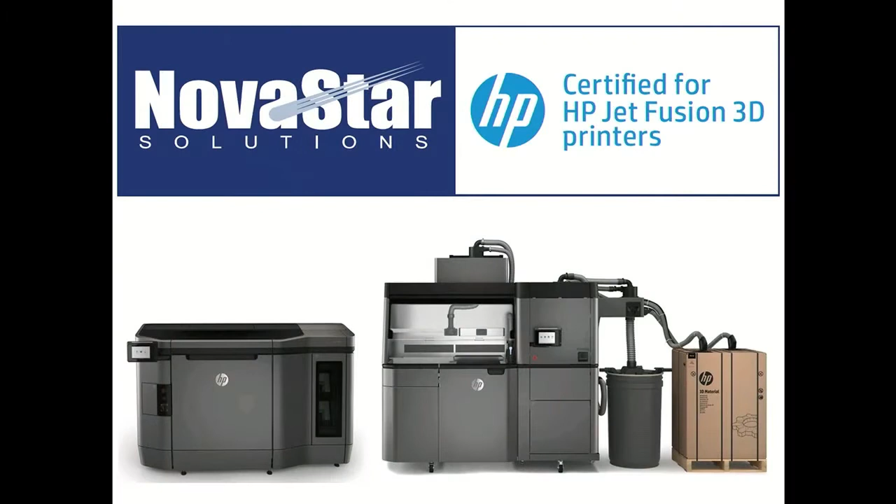Let's make sure I have this working properly. As I mentioned, NovaStar is a partner of Hewlett-Packard 3D printers here in the Midwest. This isn't a product presentation, but I'll show some videos and give you information during the discussion this morning for context. I have a question for those of you here today: how many people own a 3D printer? Okay, not that many. How many people have used or seen parts from a 3D printer before this morning? Okay, a few more. This technology is a little different than what you've seen before, giving the products a lot more functionality, but you'll see that as we present.

So to kick things off, I am going to show a brief video.

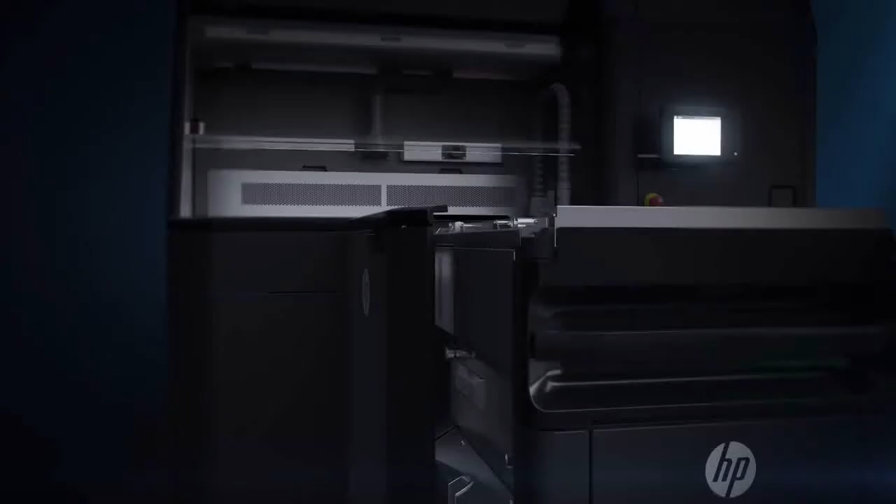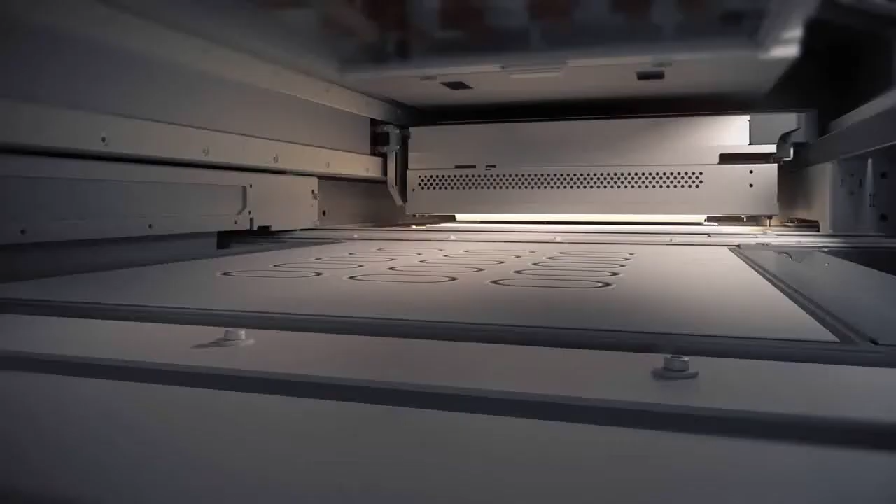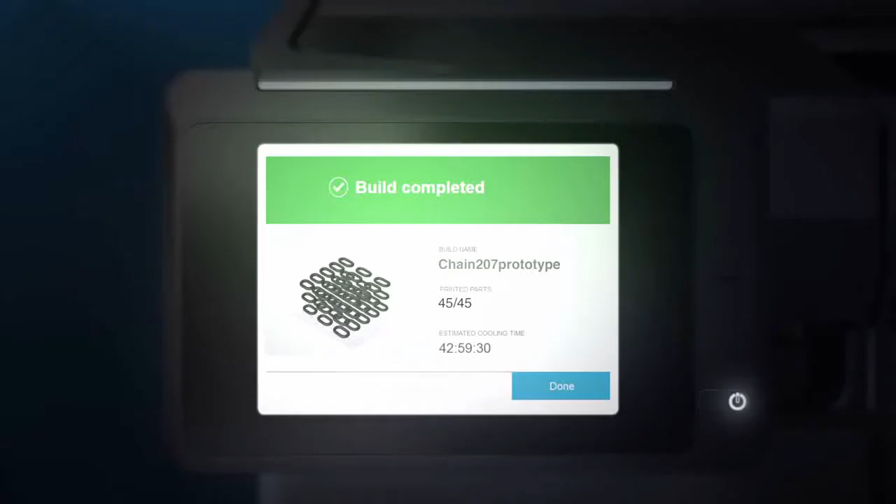Introducing the HP Jet Fusion 3D printing solution, made up of a printer, build unit, and processing station with fast cooling. Now you can deliver functional parts up to 10 times faster at the lowest cost. HP software enables easy job preparation and accurate job monitoring. The HP Jet Fusion 3D processing station with fast cooling is designed for a cleaner, more efficient 3D printing workflow. Replacing materials is easy—with materials loaded, the build unit slots into the printer so production can start. Preprint and in-printer checks enable predictable, quality output. HP Multi-Jet Fusion technology delivers extreme dimensional accuracy and optimal mechanical properties faster. Once the print job is complete, the build unit can be moved on for post-processing, and the next unit slotted into the printer so you don't have to stop production. The HP Jet Fusion 3D processing station makes post-processing easy, from faster parts cooling to cleaner unpacking and materials reuse and mixing, keeping the powder contained so you don't need an additional room for parts removal. New HP 3D High Reusability PA12 leads the industry in reusability, so there's less waste and less cost. The HP Multi-Jet Fusion Open Platform gives you access to a wider range of future materials and applications. HP Jet Fusion 3D Printing: start producing more functional parts within the same day, up to 10 times faster and at the lowest cost. HP, keep reinventing.

So to recap what was in the video, the printing process is really a four-part process. We put down an 80 micron layer of fresh powder, and then we apply two different agents. The one indicated with black is the fusing agent, and the one indicated with blue dots is the detail agent. The fusing agent goes down where you want part, and the detail agent is immediately adjacent to that where you don't want part. This enables very high resolution. If you look at some of these parts, like a knurled nut, the detail agent really enables that kind of detail on the part.

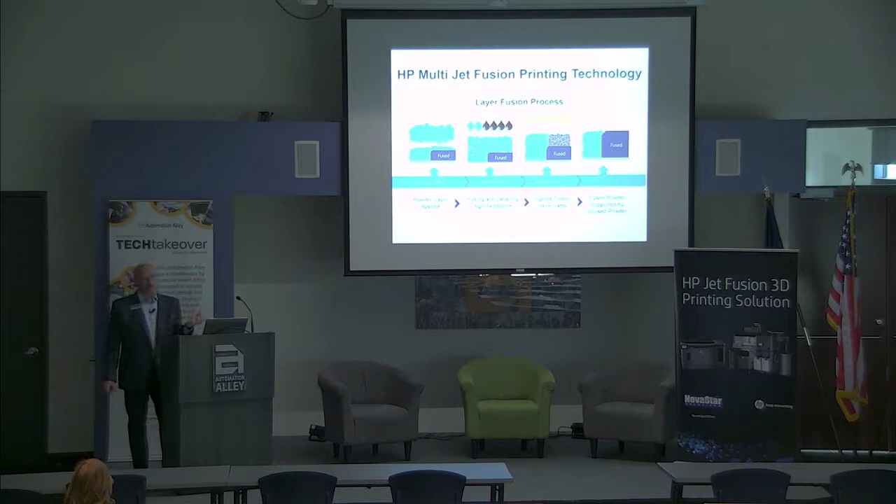Once the fusing agent and detail agent are laid down, we pass over with a heat lamp. Where the fusing agent has been applied, the parts fuse. Where the detail agent has been applied, it inhibits fusing so it does not fuse. Once the heat lamp has passed over, you have that layer properly fused or unfused where you don't want part. It does this over and over in 80 micron layers to build up the part. The nice thing about this technology is that it fuses multiple layers every pass, so you get really good entanglement between layers and really good material properties. The parts are very strong, and also airtight and watertight as a result.

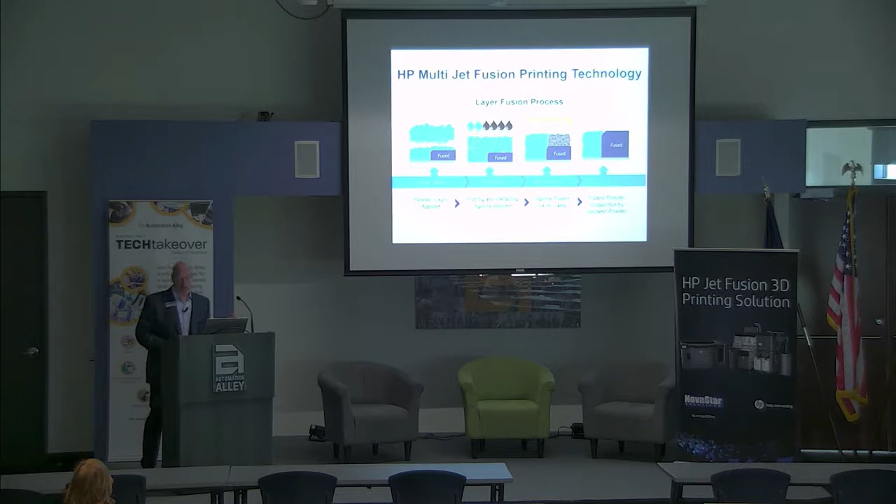Here's another video that dives a little bit more into that fusing process.

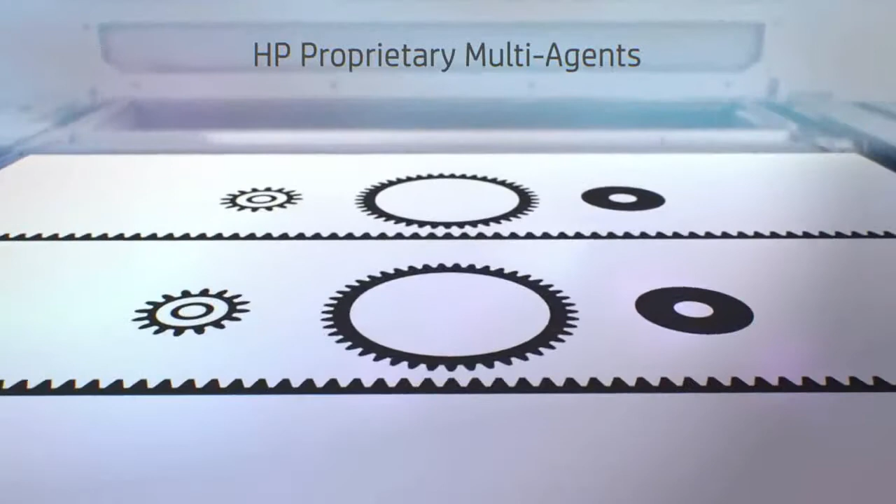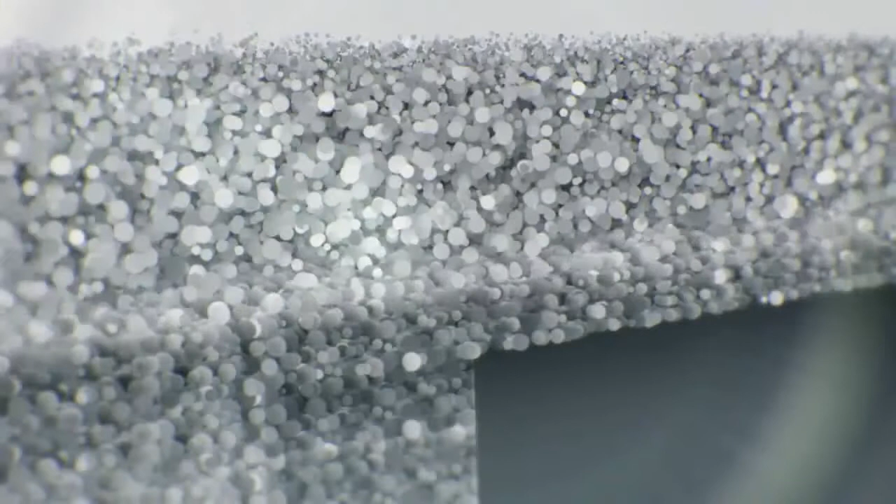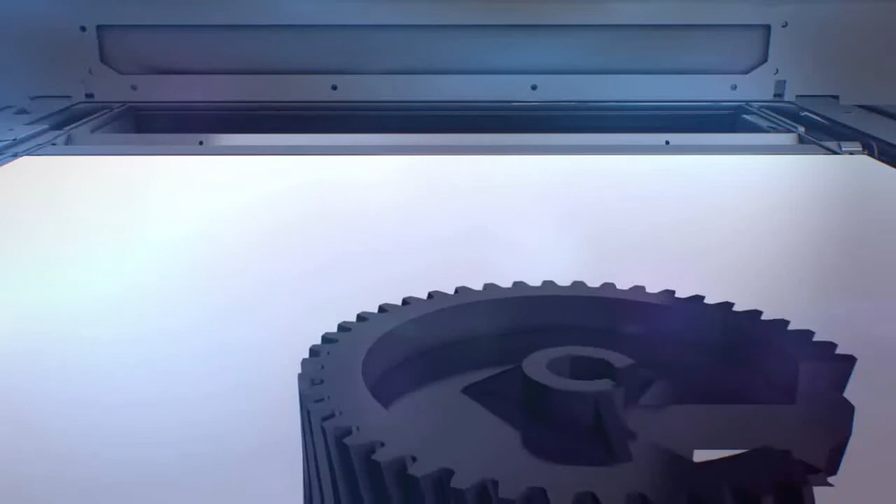To produce truly functional parts, it's important to ensure that the material has been properly fused and that part edges are smooth and well-defined. To achieve part quality at speed, HP invented a multi-agent printing process. In this process, a fusing agent is applied on a material layer where the particles are meant to fuse together. A detailing agent is applied to modify fusing and create fine detail and smooth surfaces. The area is exposed to energy, and reactions between the agents and the material cause the material to selectively fuse together to form the part. The fusing process requires accurate temperature control across the entire material layer.

One thing to note is that fusing process is not a chemical process, it's actually a thermal process. So the parts remain recyclable, and that's very important to some people.

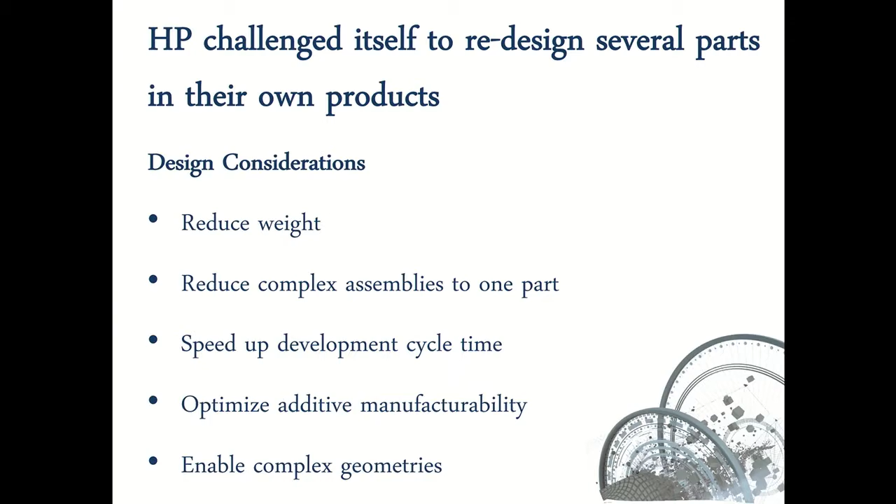Hewlett-Packard has developed the multi-jet fusion technology. Hewlett-Packard also makes a lot of other products. So one of the things HP did when they brought out this new technology was go back and look at the products they're already delivering, or will be delivering in the near future, to see what they could do using 3D printing and additive manufacturing. There's an adage in business, particularly as it applies to 3D printing: if it doesn't make dollars, it doesn't make sense. You don't want to use 3D printing just for the sake of using it, you want to use it in a situation where it adds value.

These are the design considerations HP looked at: if we're going to redesign a part, what criteria do we use? Reducing weight is something you'll see quite often, reducing multiple parts into one part, speeding up development cycles, optimizing for additive manufacturing, optimizing the manufacturability of the new 3D printed parts, and enabling complex geometries you couldn't achieve any other way.

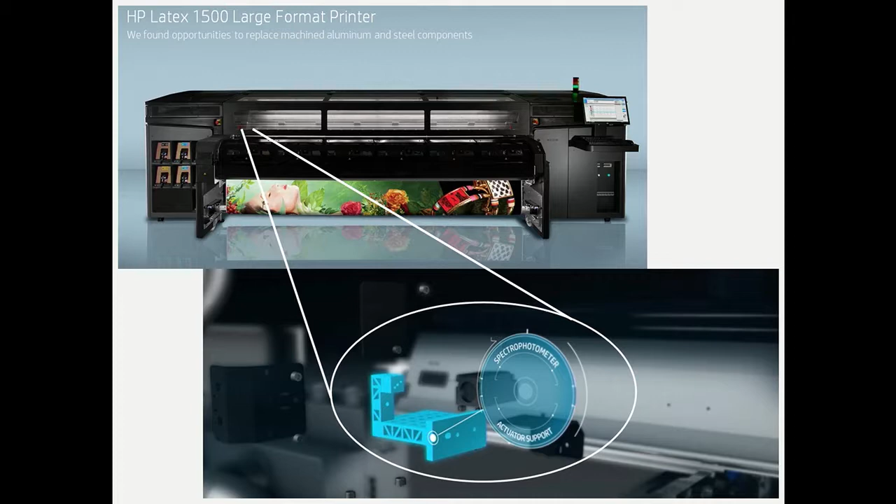So we're going to do a deep dive on each of those criteria. The first is design freedom to lightweight parts. This is a picture of a large format Hewlett-Packard printer used in commercial applications. Each of these printers makes incredibly lifelike images, and they have a spectrophotometer as part of the printer that's actually monitoring the output of the printing process to make sure it's what it should be.

So what they did was take one of the supports used for the spectrophotometer in this printer and decided to manufacture it with 3D printing technology. This is what the part looked like originally. It's aluminum, and it looks the way it looks because that's the easiest way to machine an aluminum block to achieve the function.

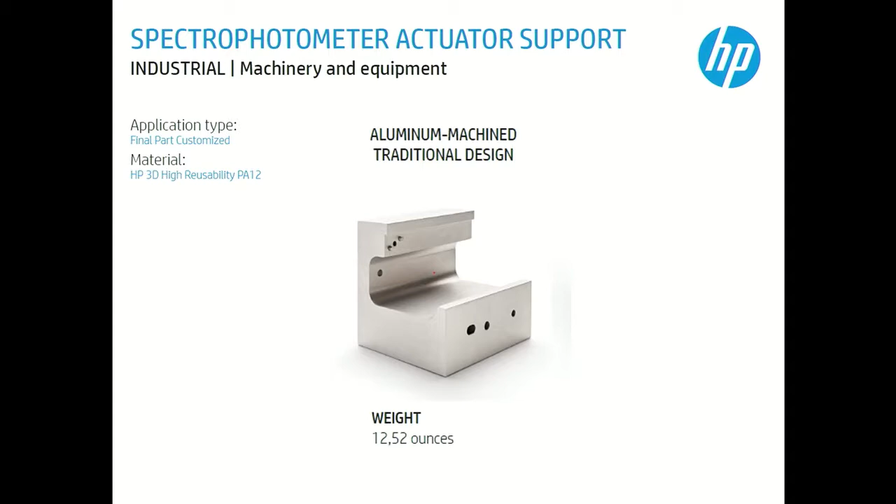So it was designed this way because of the manufacturing material and the manufacturing process. It weighs a little over 12 ounces.

What they did initially was they basically just replicated the design, but they did it with a 3D printed part. You'll see this very often in industry. People will take parts that they've manufactured a traditional way, and they'll basically replicate it.

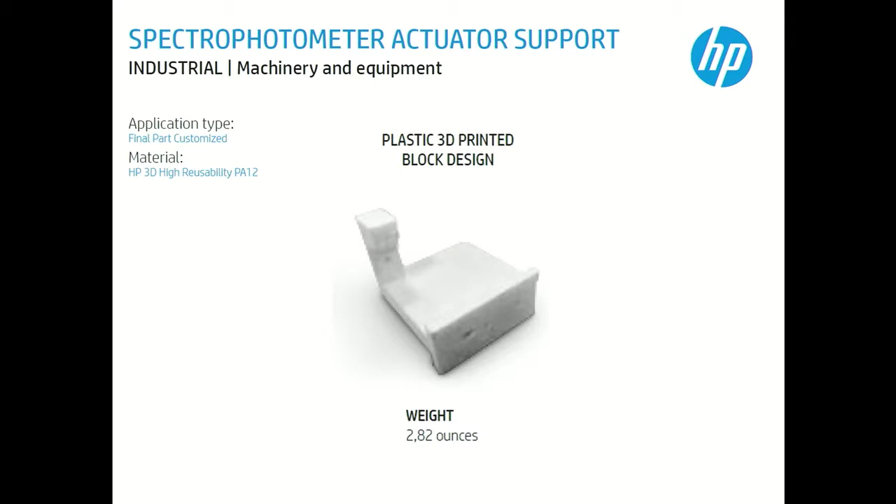So the first iteration, they just did this block pattern. It looks very similar to the initial part.

Then they said, okay, we can lightweight that. If you lightweight it, you can use a smaller motor, which costs less and will typically be more reliable. So they basically just went in and lightweighted it some, put some holes in it. You can do that. Again, you wouldn't do that with a traditionally manufactured part because it costs additional money to remove the material.

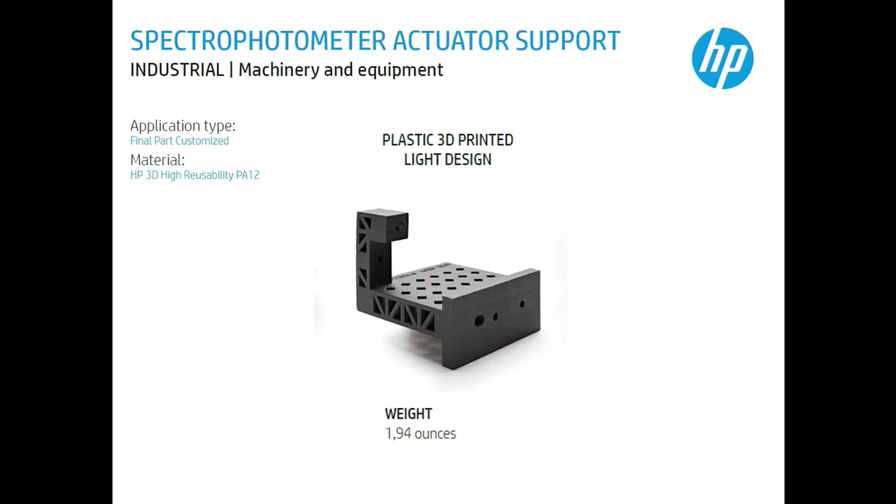But if you're 3D printing the part, it's just as easy to print that as that, but you have less material, less weight. And then they went one step further, with something called topology optimization. They said, okay, give me the minimum possible material that's still strong enough for the part. This topology optimization is a trend that's really growing in the industry.

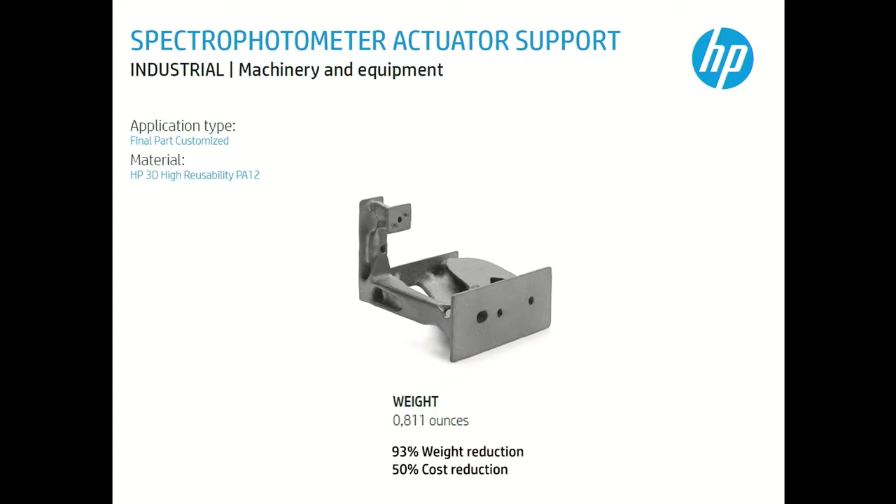There are several software packages, and you basically input some design parameters, and it will give you 15 or 500 options of how you can do it. You can't make a product like that with traditional manufacturing methods. You just can't do it. But with additive manufacturing, with 3D printing, the complexity is free.

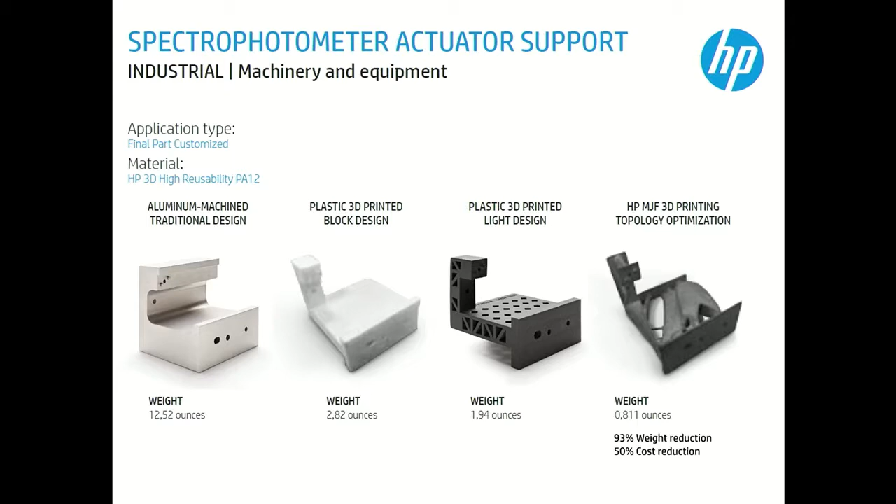So if you take a look at all of these parts and the progression they went through, the final part's weight was reduced by 93%. This final part weighed only 7% of what the original part weighed, and the cost was half.

So the question is, does it hold the same rigidity as the original part? And the answer is no, but it's sufficiently strong. The aluminum part was way overkill for what you needed. So when you design these parts, you have to know how strong it needs to be, and that's part of what you put into your design criteria for this

topology optimization. So no, the part on the right is not as strong as the part on the left, but it's more than twice as strong as it needs to be for the application. And that's the real question.

The part on the left is way overkill, but it's pretty easy to machine a block of aluminum. But it's expensive, it takes time, and it does add weight. Even though it's aluminum, it adds weight, which means you need a stronger motor now than you would otherwise.

The next design criteria we're going to look at is replacing many parts with one. So the part on the left is the original part that Hewlett-Packard uses. This part is actually used in the manufacture of the Hewlett-Packard print heads, which are very high resolution, 1,200 dots per inch, with very precise location of the holes, and they basically laser drill the holes.

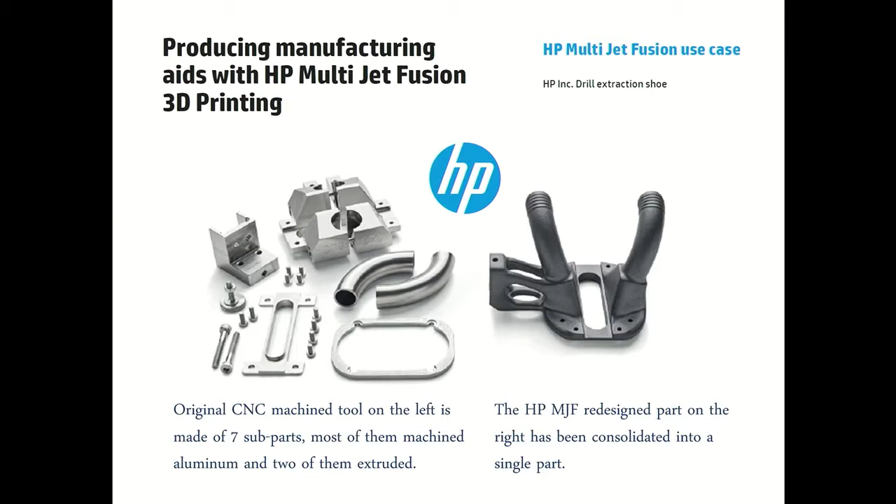In terms of reduction, it went from 575 grams down to 52 grams. The cost went from $450 to $18. And the manufacturing time was reduced from 3 to 5 days down to 1 to 2 days.

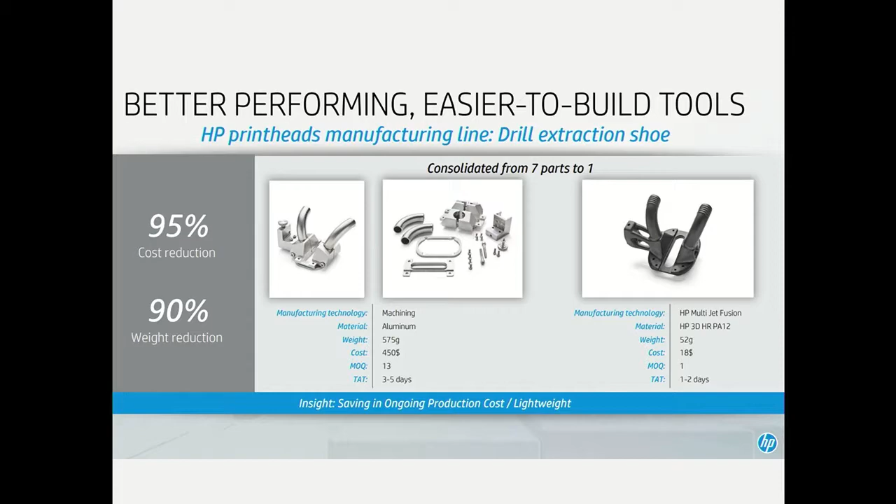So the part on the left, you can see that's the final part that's all assembled. The middle part shows all the component pieces. So it reduced the complexity in a very significant way. It made it much less expensive. You'll not know that by the price of buying an HP printhead, but it did have a substantial impact.

Yes, question? Yeah. Yes.

The left-hand side is being produced with traditional machining methods, CNC and extrusion, and then it has to be assembled together. The printer on the right uses multi-jet fusion technology, printing in a powder bed that's 11 by 15 by 15 inches tall, so you can be producing many parts in the same print build. It's typically an inch an hour, and in the 15 by 11 XY footprint you can be printing multiple parts with every pass, with multiple layers. I don't know how many you could print in one build, but quite a few. The left process, all CNC and extrusion, takes a lot of time too.

When you talk about some products, it's hard to scale up CNC machining because you need more machinery and more operators. If you're comparing it to injection molding, that's one thing, but if you're comparing it to traditional machining methods, it's going to take some time. Did that answer your question? Okay, thank you.

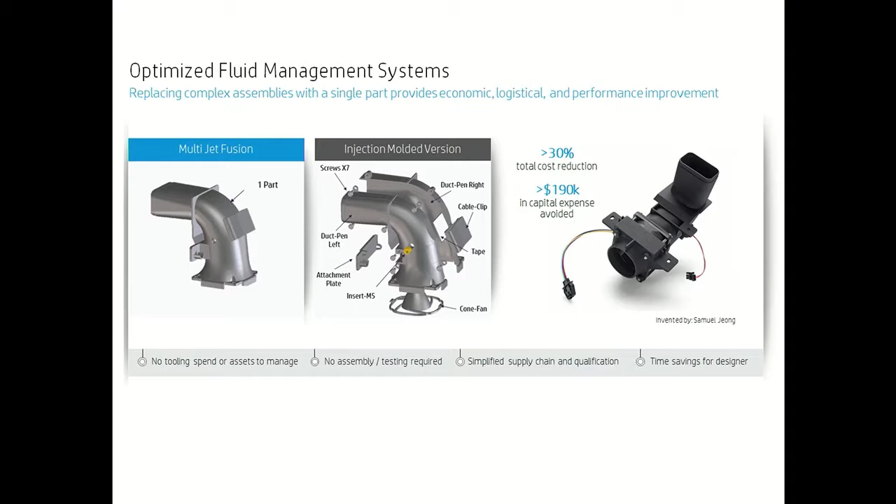Here's another example of a part where they combine many parts into one. This is actually a part used in one of the newer HP 3D printers. The injection molded version required many parts, and with multi-jet fusion they could do it in one part, but as we'll discuss, they actually did it in 2 parts because it was easier to manufacture that way. They were able to reduce the cost by over 30% and eliminate a lot of capital expense.

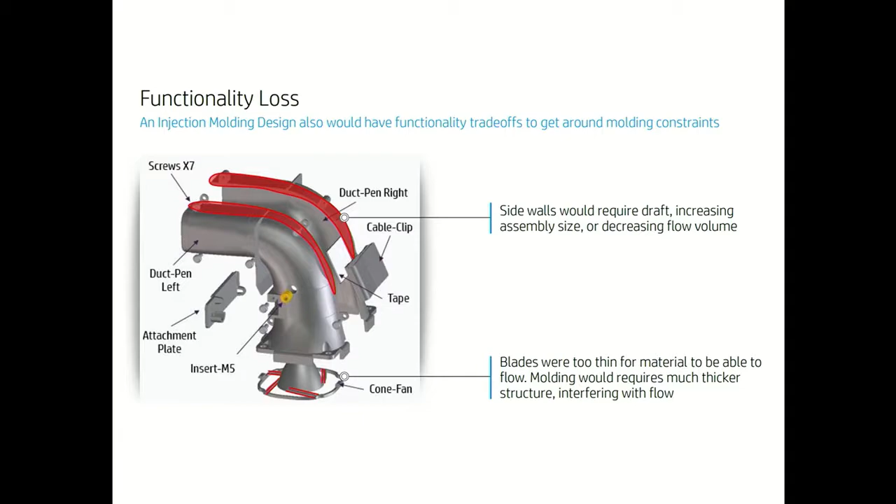Not only that, but the multi-jet fusion 3D printed part had better functionality because you were able to eliminate some of the design constraints you'd have if you were going to injection mold this part. The airflow characteristics and performance of the part were better than the injection molded part, and that was enabled by the 3D printing technology.

Another criteria Hewlett-Packard used when looking at parts to use 3D printing for was that they wanted to get these products out to market more quickly. This is a little Hewlett-Packard 3D scanner that you can use to scan parts, and they used 3D printing to produce some of the internal components rather than injection molding them.

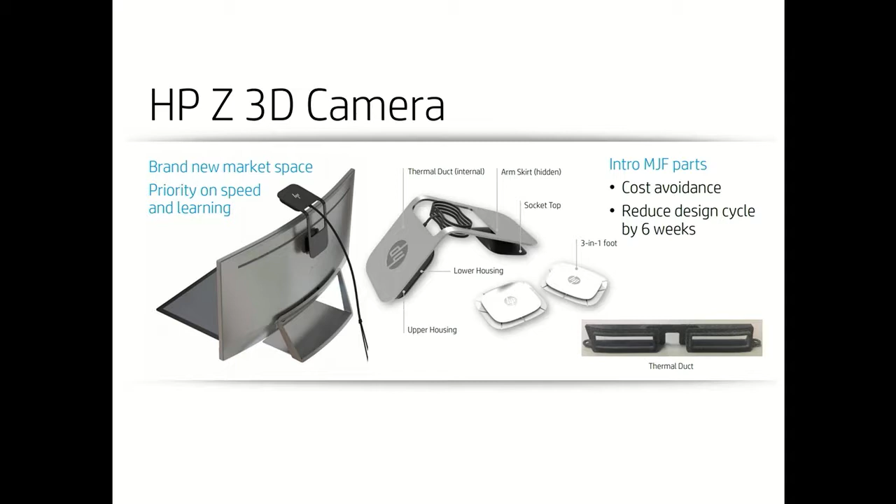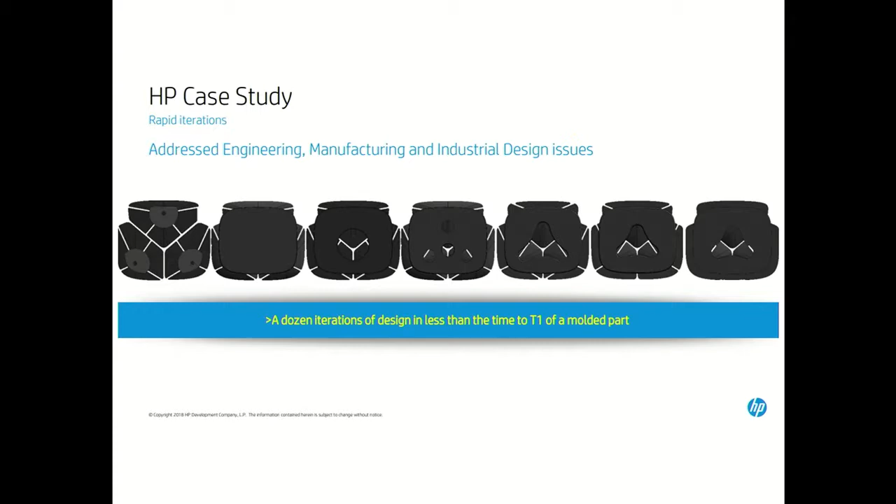One advantage of this technology is it's easy to test 5, 6, 7, a dozen different iterations of the same design to see which one works better. You can print them all in the same build, run them all, and test them out to see how they work. Injection molded parts do a great job, but you have to design the injection mold, machine it, and they're typically fairly expensive. If you make a slight tweak to the product, you have to create a whole new mold. With 3D printing, it's really not a problem - you can do multiple iterations at the same time and print them in the same build.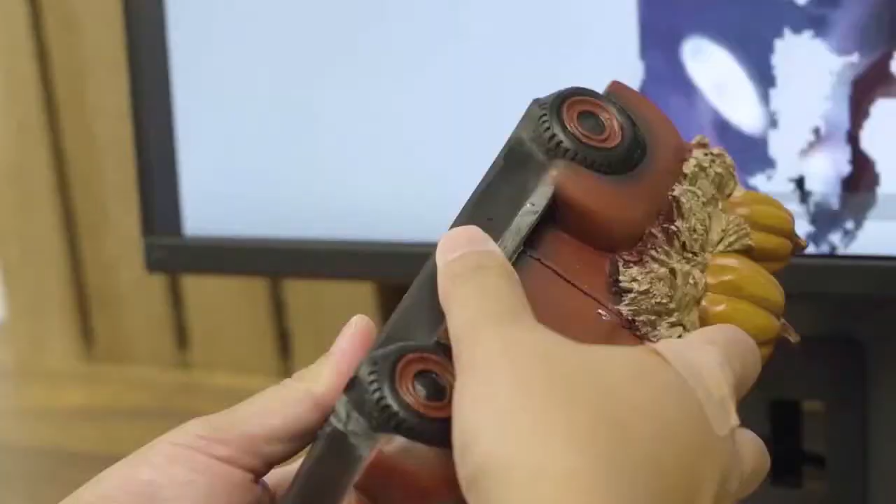Let's see, I think we actually have a video on this as well. This is the HP Z3D camera, and this is the first product from HP's computer business, Personal Systems Group, that used multi-jet fusion in development and in production.

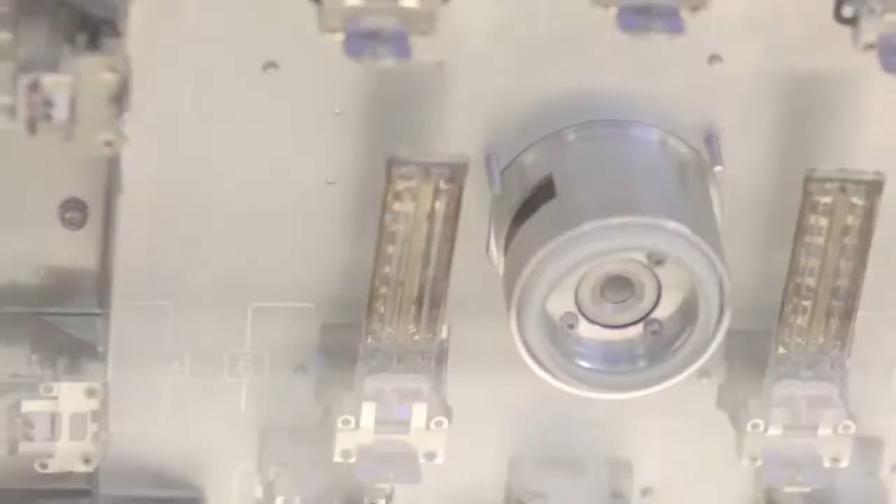When we see HP start to use some of their own technology in their own products, I think that's one of the neatest things about working with HP - their willingness to look at the technology and instantly bring it into their product development and then right into their products.

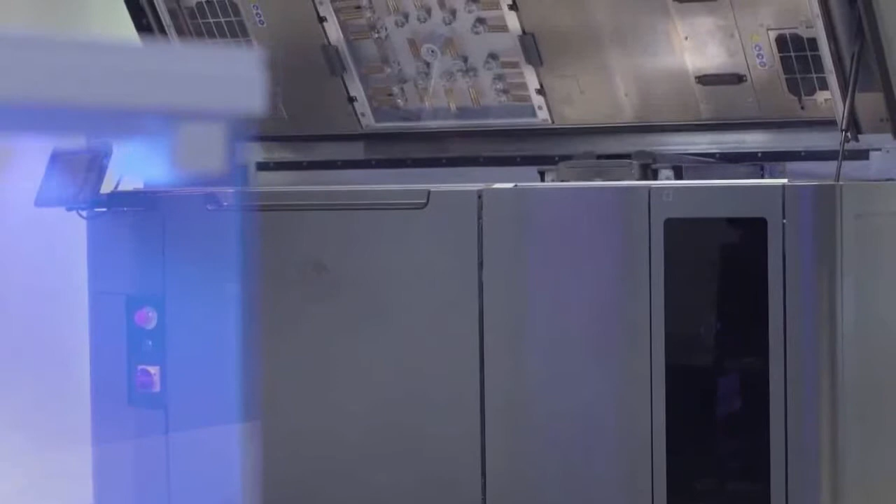The biggest advantage of multi-jet fusion is its speed and the quality of the parts. We had the luxury of being able to iterate the design rapidly and do more testing, and we did that thanks to our partners, Protolabs, who were able to be very responsive, give us very good quality parts, and produce nicely dyed black parts.

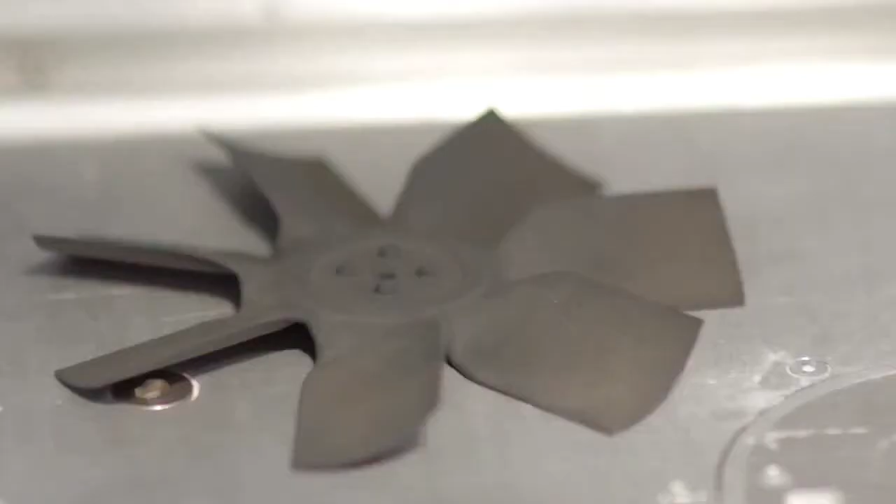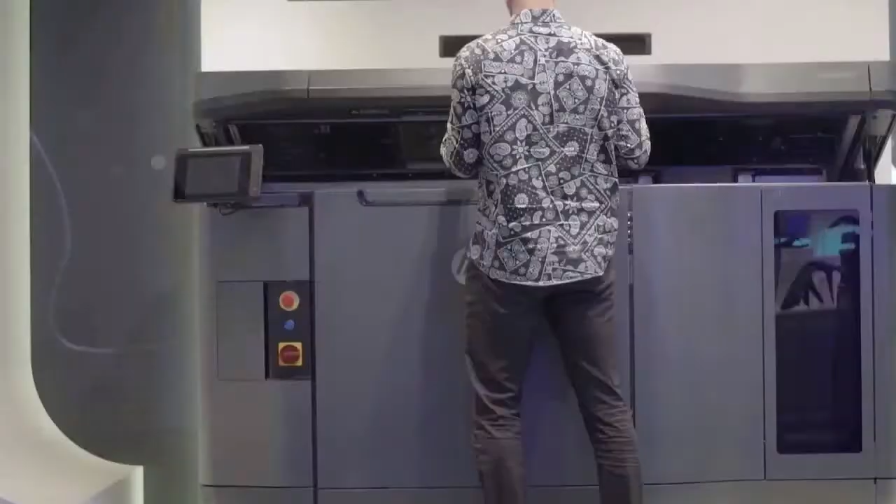Being able to work with HP using their own product is really neat, finding new applications within different divisions of HP to really test the limits of product development and looking at new ways of bringing products to market quicker. I have been developing product for HP for a long time, and I never had the chance to have 3D printed parts I could take to production.

The disruption that HP has created with the multi-jet fusion has allowed customers to really rethink how they design their parts, both for prototyping and production, and has opened the door to changing really the future of what manufacturing looks like.

A comment made in the presentation was a company called Protolabs. Protolabs is a digital manufacturer, as is DeWise, Paul DeWise, and Forecast 3D. Hewlett-Packard has partnered with a lot of companies throughout the country to provide manufacturing capacity to people who want to take advantage of this technology. So rather than printing parts ourselves, we partner with local businesses that develop the expertise, have the equipment, and can actually provide these parts to customers who can't justify the cost of their own printer.

One of the other criteria Hewlett-Packard looked at was how we can use 3D printing to optimize the manufacturability of components used in our equipment. This is the part you saw earlier that was designed for additive manufacturing. We can now 3D print the part - it's less expensive and has better performance than the injection molded part. But because of the geometry, we could only build 3 at a time in the build unit. So they tweaked the design slightly and broke it into 2 parts that could easily be assembled, and now they can fit 8 of these printed parts in one build. So they more than doubled their throughput just by a slight redesign of the part.

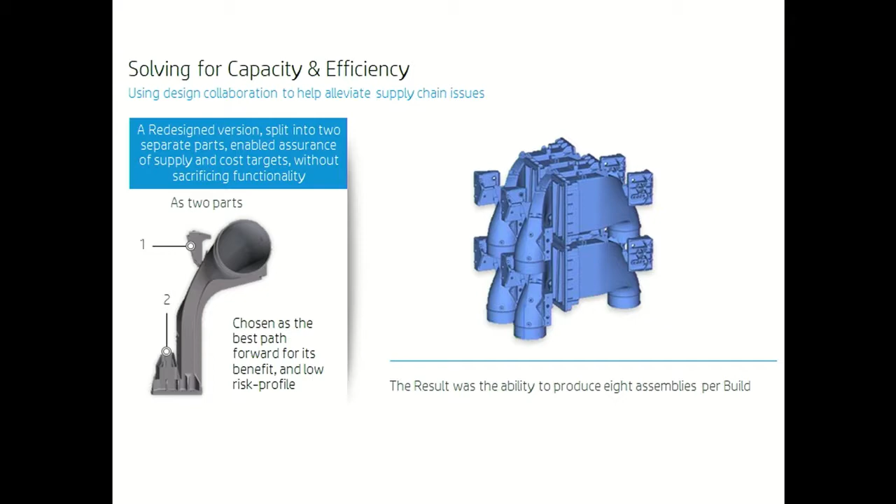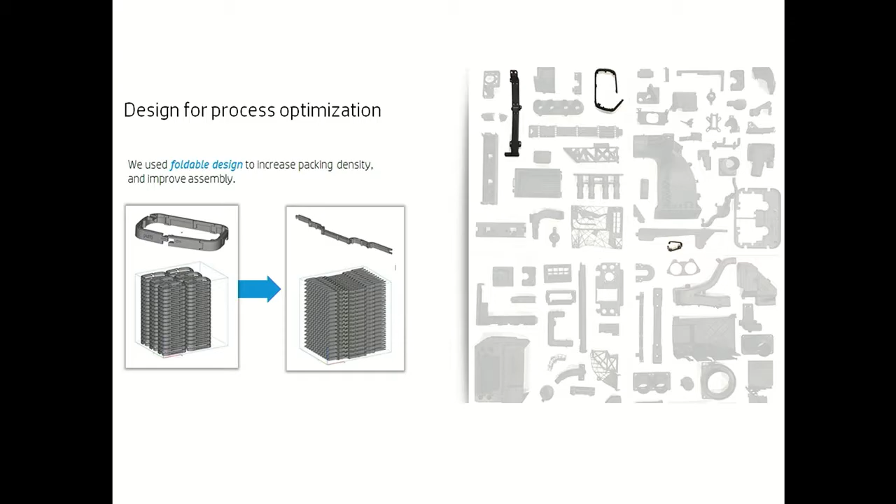Here's another example. If you take a look at that bracket up on the left, I'm not quite sure what it is, we could print some number of those in the same build unit. But if we take it and open it up and print it in the open fashion, we can now print many more. And what's interesting is that the part with all the folding pieces was printed as one part - there are moving parts in there that were printed that way. So all they have to do is snap it together when it comes out of the build unit, and it works. It enables them to really maximize the capacity.

And for people like Paul who print parts for customers, he'll tell you the more parts he can get into a build, the less he has to charge for making those parts. So the flexibility this technology provides has a lot of pluses, including the fact that parts can now be made in a more cost-effective way.

One of the other criteria Hewlett-Packard looked at is, are there parts we can combine and things we can do with complex geometries that we couldn't do before? This is an example from a consortium in Europe called IAM 3D Hub. It's similar to the America Makes consortium here in the United States, if you're familiar with that. It's a private-public consortium, and their objective is to help companies be more competitive.

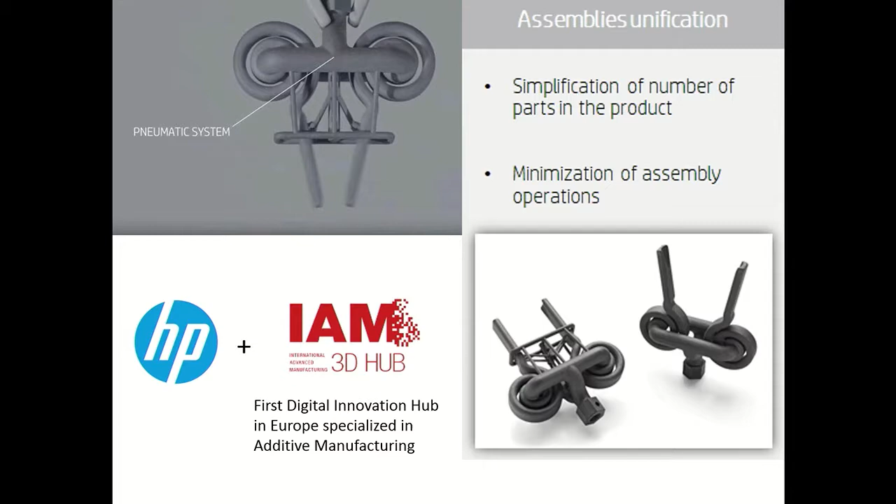They developed this part - I've got a video that shows how it works - that can be used for picking. It's robotic, and it's a pneumatic application. That was all printed as one part, and I can't think of a way to print or manufacture a part like this other than using 3D printing.

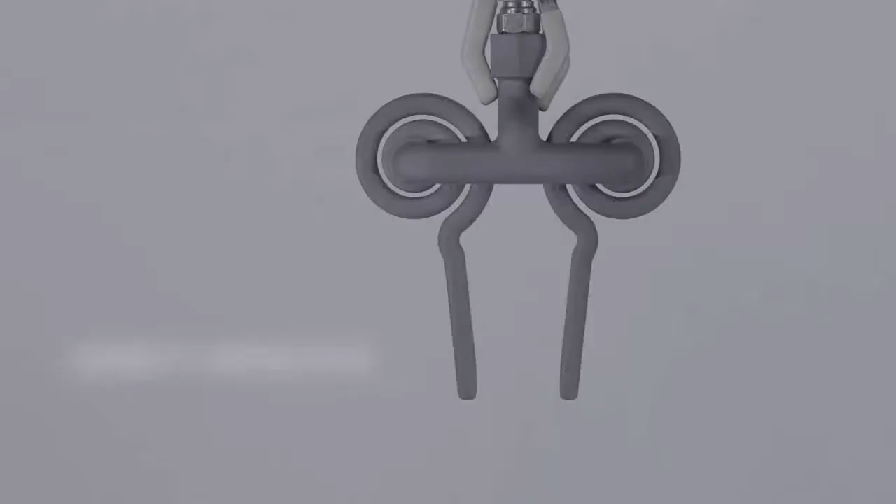The parts can be very durable. This one's been tested for 1 million cycles. And because the parts are fully fused as they're being printed, you can use them for pneumatic and hydraulic applications, which is not true of most 3D printing technologies.

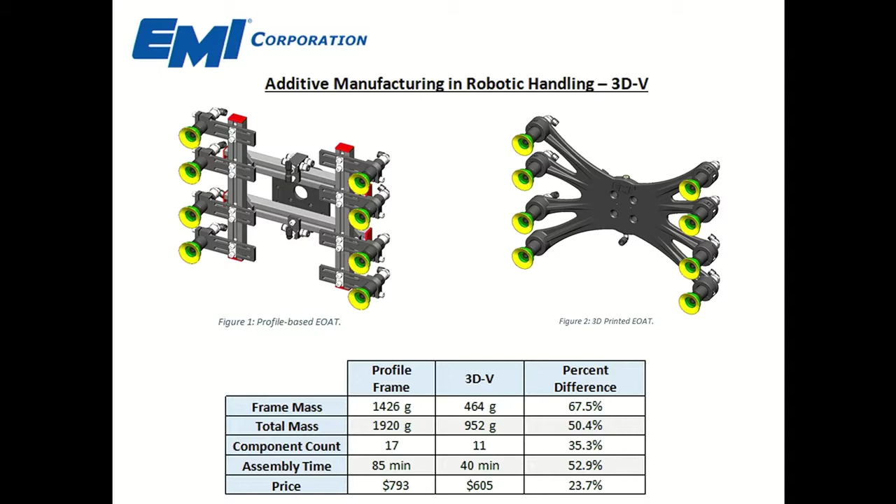We've talked about a lot of the parts Hewlett-Packard has done internally using 3D printing. This is a part actually from another one of our customers, a company called EMI. They're down in the Cleveland area, and they make end-of-arm tools for robots. They also make conveyor systems. The product on the left is their original design, basically a robot grabbing device used with a collaborative robot. One of the things about collaborative robots is they're collaborating with people, so they tend to be fairly low power because they don't want to inadvertently destroy or kill somebody. So the payload is fairly limited.

The original tool, even though it was made of aluminum, was 1,426 grams, which is almost 3 pounds, I believe. Then they replaced that with the design on the right, which was 3D printed, and reduced it by a factor of 2/3 - so it's only 1/3 the original weight. This is really important because anything you can do to lessen the weight of the tool goes directly to the payload of what the robot can do.

The mass is a lot less. The component count has been simplified, going from 17 down to 11. The assembly time was more than cut in half, and the cost is 23% less. Again, that's not a huge cost reduction - that's kind of the icing on the cake because of all the other things they gained.

No, it's strictly the manufacturing cost. Yes.

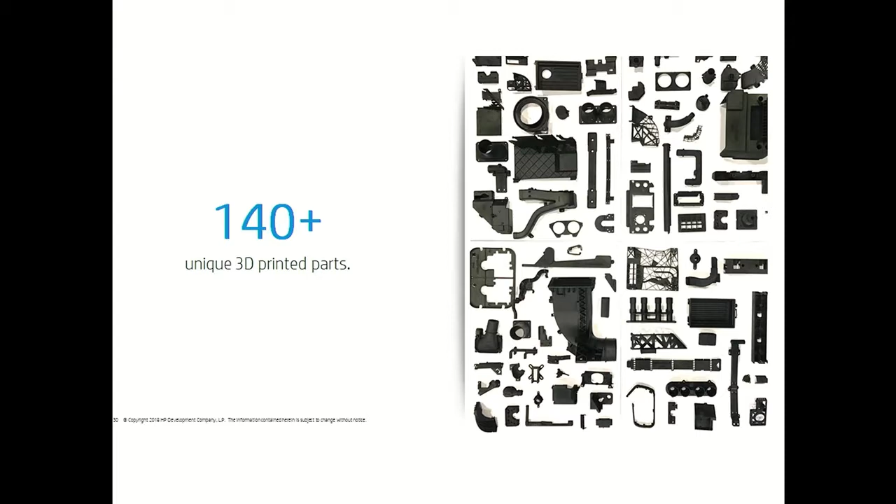Now, one of the things that's really intriguing about the Hewlett-Packard technology is that the 3D printers now print parts for the HP 3D printers. If you take a look on the right, you'll see some parts you might have seen elsewhere in the presentation. The HP Series 500 3D printer has over 140 parts in the printer that were printed by HP multi-jet fusion printers.

So they are using this technology heavily. And 3D printing with multi-jet fusion, at least, is no longer just a prototyping tool. It's certainly something you can use for full production parts.

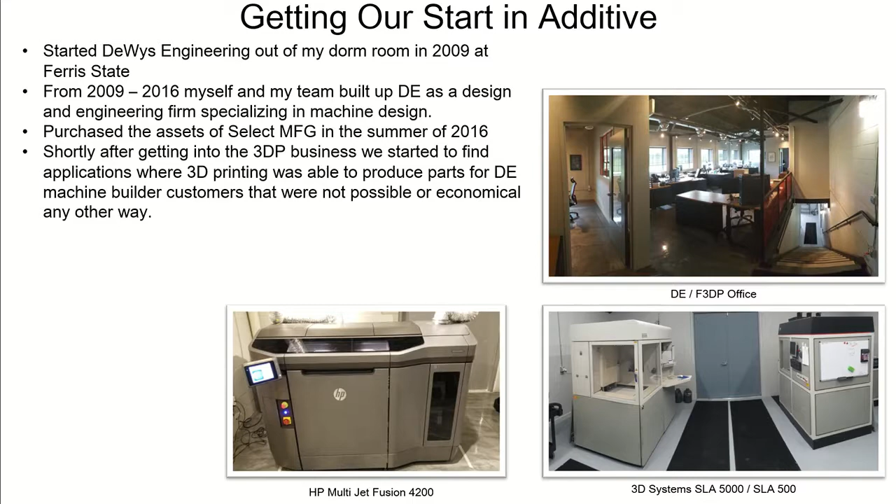So my background: in 2009, I started a CAD design engineering firm, DeWys Engineering. Actually wearing the wrong shirt today, so I got my DE shirt on. We started out in the engineering world, and about half of our business was machine design, automated equipment design, shop floor hand tools, shop floor equipment, things of that nature.

From 2009 to 2016, built that business up with a couple of employees. In 2016, I had an opportunity to purchase the assets of an existing 3D printing company over in Muskegon, Michigan. We're actually located on the west side of the state, near Grand Rapids, a little town called Coopersville. So we purchased the assets of this 3D printing company. They'd been around since '94, one of the very, very early ones to the industry, and we got two SLA systems with that purchase.

So went along for a couple of years, having my engineering business and this 3D printing business, and kept running into this situation where my machine designers would be sitting there looking at a part that needed a nest or a gripper design. And the conversation would always end up with, man, wouldn't it be cool if we could just print this? Because think of what we could do. And it was always like, yeah, but we can't because the materials suck. That was the big thing that held us back. Materials in 3D printing have sucked for a long time.

Finally it got to the point where we said, you know what, we got to find a solution, because there's this huge opportunity for automation companies and machine builders and integrators to use additive. We just need to find an additive technology that we don't have to shoehorn their application into. We need to find one that naturally fits in with their business.

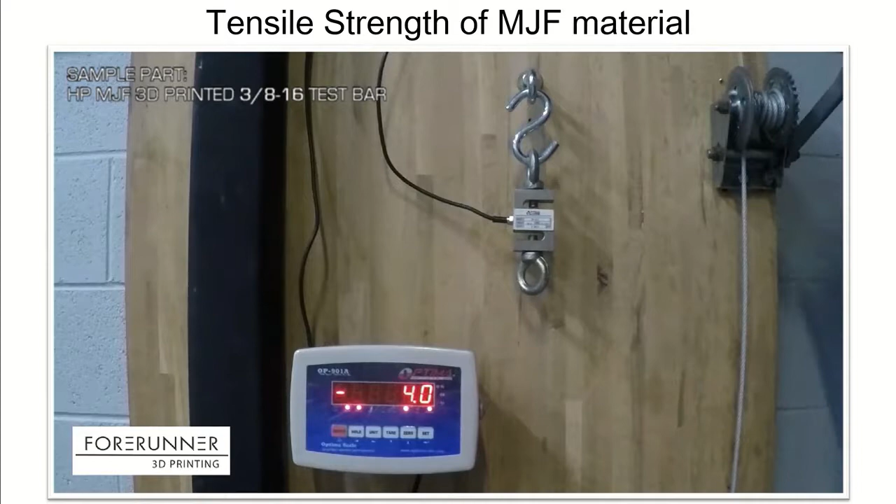You can see we're up to around 345 pounds before that part breaks in tension, okay? And this is the same material you see back there, those gray parts, the black parts are the same. It's PA12. It hasn't been treated with anything. There's no inserts. It's literally just 3D printing that you're seeing there.

Now this is a 1/2-13. We got this one all the way up to 650 pounds, and we started to actually break our pull tester. So we stopped in this video because I didn't want to get hit in the face with a metal clevis. But eventually we rebuilt the pull tester, and we got up to 900 pounds before we broke these half-inch fasteners in MJF. So this material, from a strength perspective, is just insane.

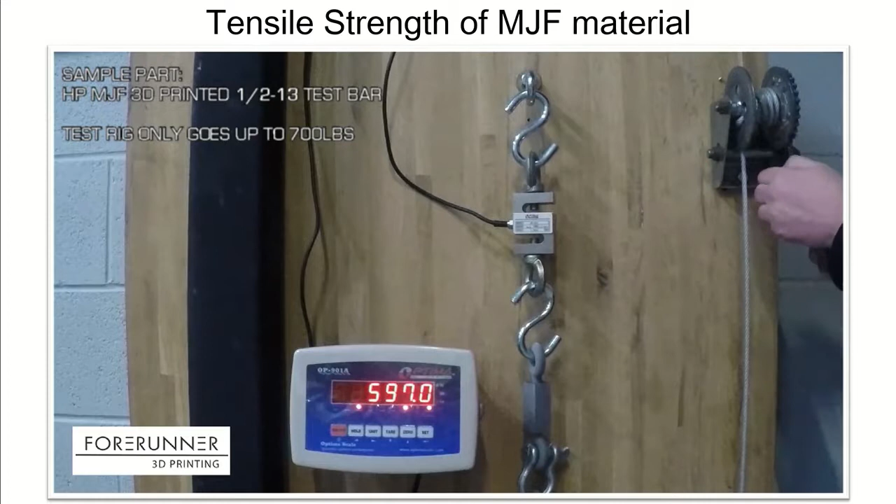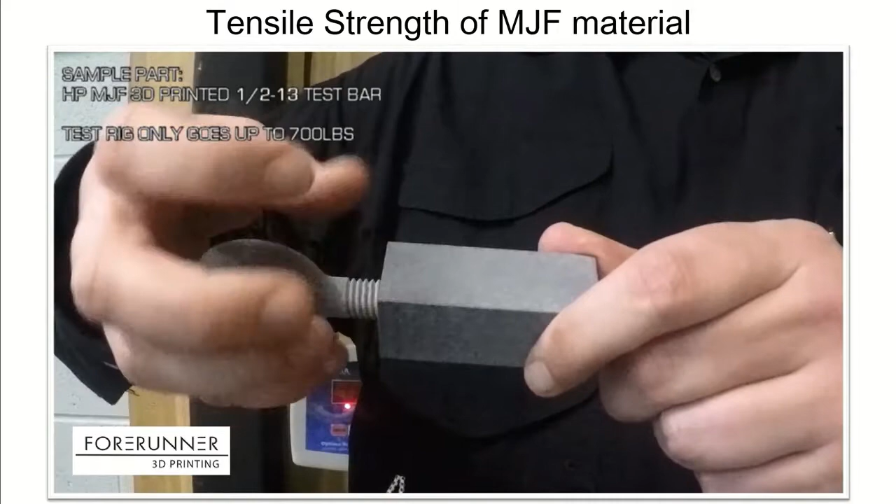And by the way, that's pulling on 3D printed threads. I do not recommend you 3D print your threads - use key inserts, use helicoils, use inserts, but this is a testament to what the material is capable of. I'm pulling it apart here, and it'll show you in a second - it didn't actually permanently deform the threads or anything. The threads screwed out just fine. It wasn't like it plastically deformed them inside the part. So that's a pretty good indicator of part strength.

So yeah, there we go. So let's see, here we go.

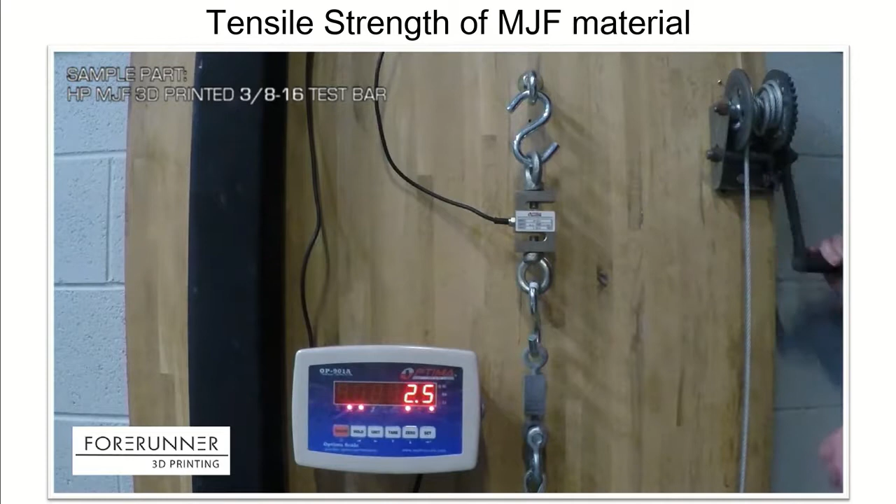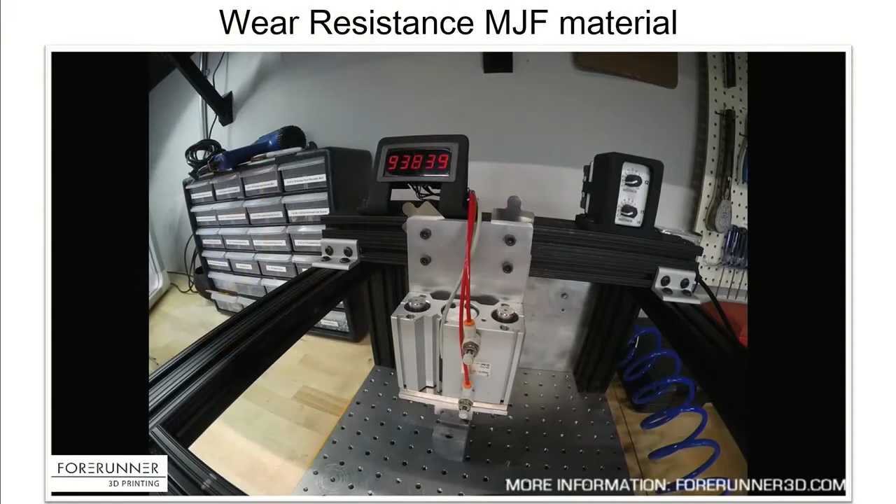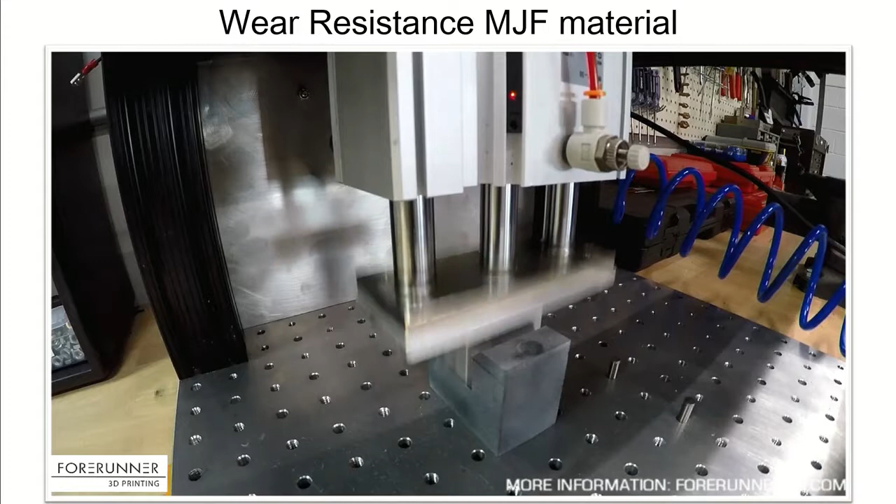So the next thing was, I go back to my machine builder, I go, see, here's a video right on my phone, it's super strong. He goes, great, how wear resistant is it? And I'm like, it's super wear resistant. He's like, qualify that. I'm like, back to the lab. So we go back to the lab, and as machine designers, we designed a little wear testing machine, and that's what you're seeing a video of right here.

So we built this 80/20 frame, an aluminum jig plate with a bunch of dowel holes and bolt holes drilled into it. This detail that we're testing, this MJF detail, is actually sitting back at the back of the room there. So feel free to check it out at the end.

We put it in, we lined everything up on this 80/20 frame, tightened it all down, and then we loosened the bolts on the cylinder, and we put 10 thou misalignment shims behind the cylinder to actually move the cylinder out of position. So it created about a 7.5 thou interference with that nest. And then we hit it 100,000 times.

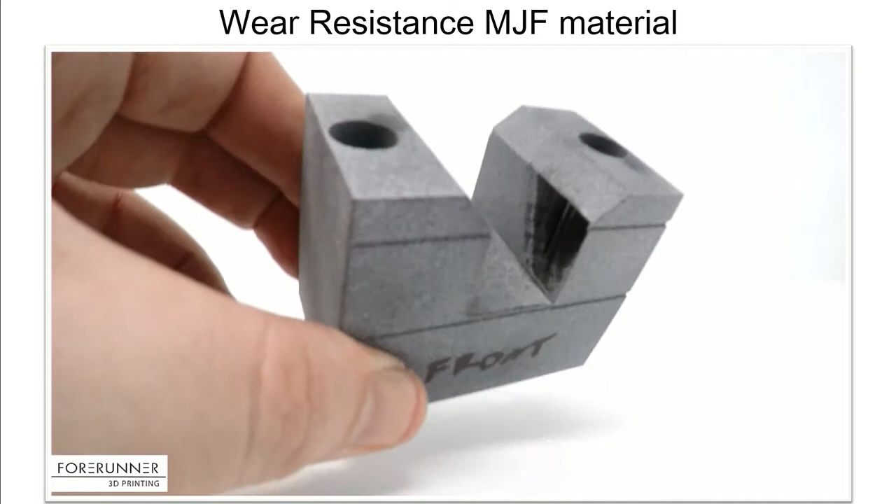Over that 100,000 cycles, it actually forced the detail to twist. We didn't actually dowel the detail in place, so that was a mistake on our part, but it forced the detail to twist a little bit. So that's why you're seeing corner to corner wear. But the worst of the wear was only about 13 thousandths.

So this is a laser scan inspection report that we did of this detail after the 100,000 cycles. You can kind of see for yourself, you've got the really dark blue ditch on the left-hand view, kind of up towards the upper right-hand side of the part. That's 13 thousandths. Other than that, everything's kind of in that 5 to 6 thousandths range of wear.

So we always kind of figure when we're designing machines, worst case scenario, unless something's assembled wrong, is when a human is putting a part into and out of a nest, because humans are sloppy. Robots are precise, but humans are always sloppy. So we did this to qualify an operator just kind of throwing a part into a nest and getting those kind of bad wear conditions as the part's getting loaded in and out. And so it held up over 100,000 cycles.

Another thing that was really interesting that we wanted to check, the underside of this part is actually hollowed out. Call it a material saver. We want to cut as much excess material out of the part as we can, because whatever powder I don't sinter, you don't pay for. So we're trying to cut costs that way.

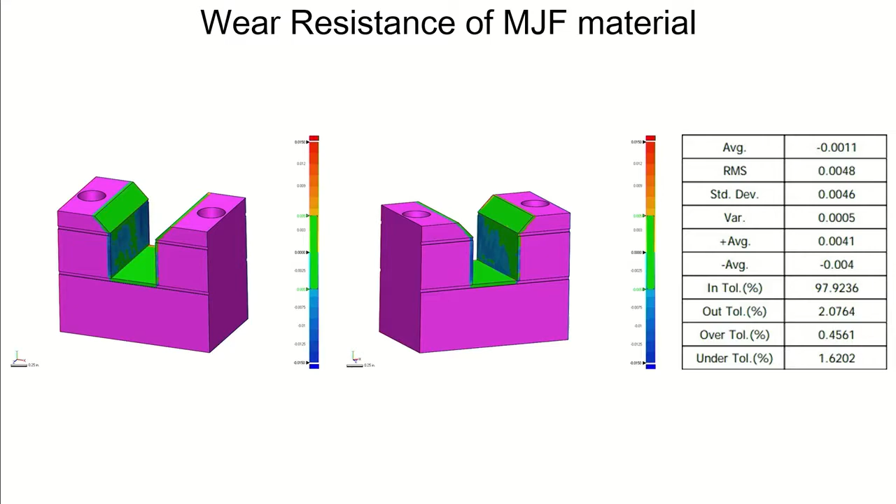So that 32 millimeter bore running at 80 psi shop air, that's having 100 pounds of force coming down and hitting full power into the bottom of this nest. Over that 100,000 cycles, we lost 2.5 thousandths to compaction. So even when you're running a cylinder into this stuff over and over and over again, it doesn't deform, it doesn't crack, it doesn't chip, it doesn't even really compact.

So this is the type of stuff that really positions MJF to be excellent for end-use parts, whether it's on automated equipment or if, like in Dave's case, you're running production. These aren't the SLAs from the 90s where you carefully set it on the conference room table and then say, no one touch it, because if we do, it's just going to shatter. This is a completely different animal.

So naturally, I continue to go back to my machine builders, and they continue to come up with reasons why they don't want to use this. The next thing was, well, how accurate is it? Okay, accuracy. What can we expect?

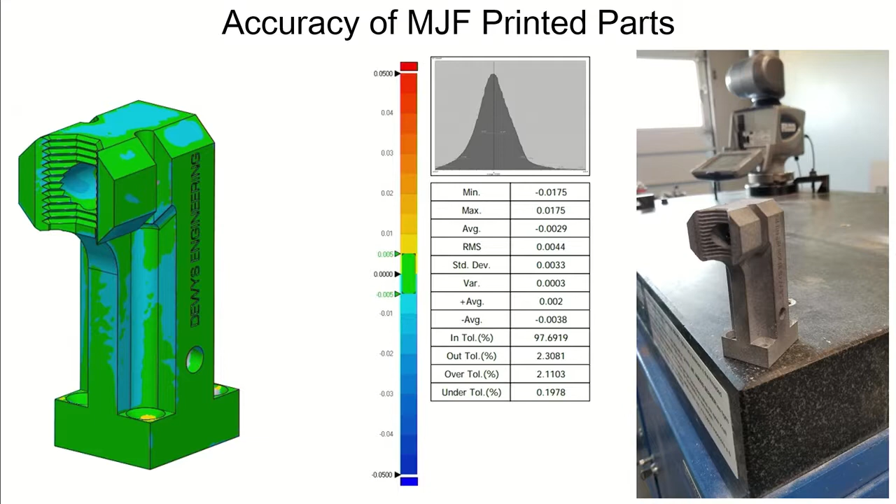And so we went back and we printed up some gripper fingers. These gripper fingers are actually sitting back on the table, so you can actually see the parts we actually scanned. Scanned them on the Faro and got this inspection report to come out. We set our tolerance on this to plus or minus 5 thousandths, and we're 97.6% in tolerance.

The areas that are falling out of tolerance are not necessarily critical areas. You can see our gripper teeth are all within spec. It's areas like the top and sides. You're just getting a little bit of shrink on the part. Depending on how you orient the part in the build chamber, you are going to get shrink and warp in certain areas, but we can process around that.

So, being that we know how the machine will perform when customers send us parts, it's not just like take the part, throw it into the build, quote it, send out a quote. It's more of an interactive process for us. What are you doing with this? What are you trying to accomplish with this? Where do you need it to be really good on tolerance? Where do you maybe not care as much? Because we can process around tolerance issues. But all told, plus or minus 5 is not all that bad. Generally, there's a lot of machine shops that will pretty much run on this level of precision.

We've also done a lot of experimenting with dowel holes. Generally, if we get into really large components, maybe 12 to 14 inches in length, not necessarily dense, with ribs coming off and dowel holes, those tend to warp more—out into the 15 to 25 thou plus or minus range. In that case, we've treated these parts almost like a casting. We'll put them into a Bridgeport, indicate in and machine the critical dowel features, so you get all your geometry connecting this area to that area without caring how accurate it is between those two points. Machine the dowels, maybe do a cleanup operation, and treat it like a casting. But generally it's rare we have to do that—you'd have to be talking about an extreme precision operation, like clip driving onto a temperamental clip feature on plastic parts. Generally the accuracy is good enough for pretty much everything we need in a machine build application.

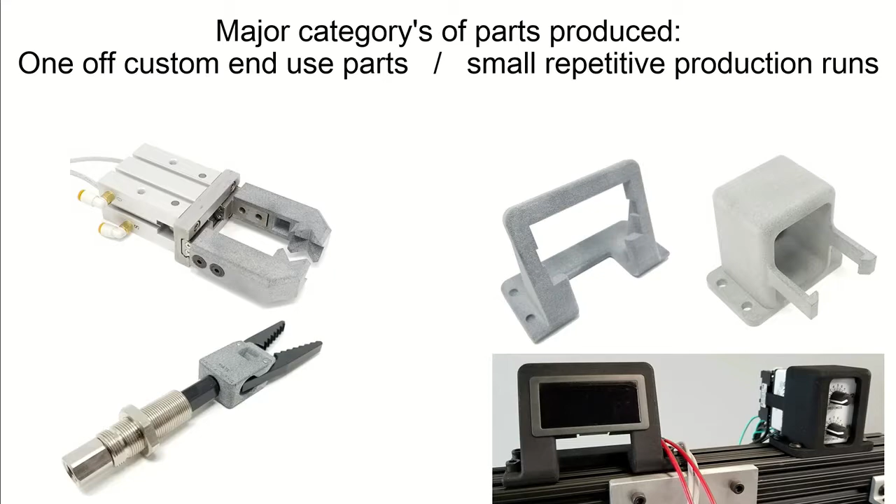The material's good up to, on the box, about 350 degrees Fahrenheit, and it's stable up to those temperatures. We've experimented with going over that momentarily—sometimes we have to grab really hot parts out of injection molds, maybe 400 plus degrees. We'll reach in, grab the part, quickly drop it someplace else, and hit the MJF part with an air blast to help dump heat out of it. So you get away with higher temperatures momentarily, but you've got to get that heat back out of the part—you can't go too fast. You'd have to grab it, set it, and air blast to cool it, repeatedly. But up to 350 degrees, there's no warp, there's no twist. It's stable, and you get good deflection performance out of it.

I didn't put anything outside for the polar vortex this year. I probably should have—that would have been the way to test it. That's a great question, I don't have a good answer for you on that. We have not had an extreme cold application yet. If you have something in mind, come see me after this, I'd love to hear what you're thinking, and maybe I can get you some spec parts, because I'd love to know. I don't know, but it sounds like I've got some more testing to do.

A key thing to know is that the performance of the material is going to be basically the same as if the part had been injection molded. The material properties of nylon 12 are pretty well documented, so the question is how bad does the manufacturing technique or technology mess with that. The good news is the material properties are very strong. If the part had been FDM, filament printed, you'd probably have an issue with layers. If you had sintered the part rather than fully fused it, it might not perform as well. But if that material works well in an injection molded application, it should work fine if it's been manufactured using multi-jet fusion.

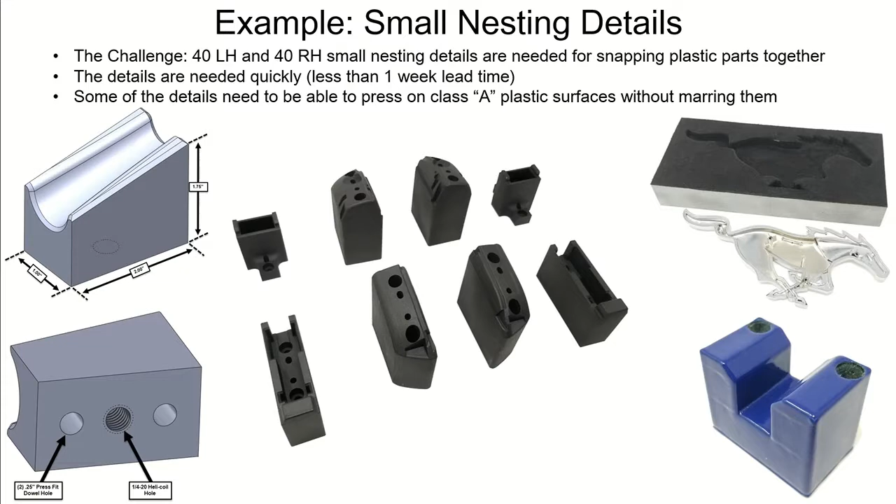So we had a machine builder come to us, and specifically we were talking about these details right here. The challenge: take 40 left-hand and 40 right-hand small nesting details that are needed for snapping two plastic parts together—actually snapping chrome inlays into a grill. The details are needed quickly, less than a 1 week lead time, and some of the details need to be able to press in on Class A plastic surfaces without marring them. Class A would be a chromed surface, a painted surface, or an injection molded surface that you can't scratch. It needs to have a Class A level of finish for the exterior of the vehicle.

So we can fit these 40 or 80 parts of this size right here. We can fit all 80 of those details into a single build, and our lead time to actually produce those parts would be 3 to 4 days. That's from us starting the build to us either delivering them, dropping them off, or the customer picking them up.

One of the cool things about MJF is the more parts I can throw in that build, the cheaper your per-part cost becomes, because, like you saw earlier, we can nest in the X and Y, we can also nest in the Z. With nests like this, each one of these 80 parts is different—it's either a mirror image of one of the others, or it's completely different. In a typical machining situation, it would be 2 setups, because you'd have to put the holes in the bottom, and then do the profiling work on the top.

And then I'm going to have to CAM program at least 40 of the details. Then I'm going to have to either mirror my CAM program to get the other half of the parts, or completely program those on my own, depending on what your CAM strategy is. Then I've got to set up vices in my Haas, put in a bump stop, indicate all the vices in, and load my programs. By the time you do all that, it's a lot of work and a lot of time.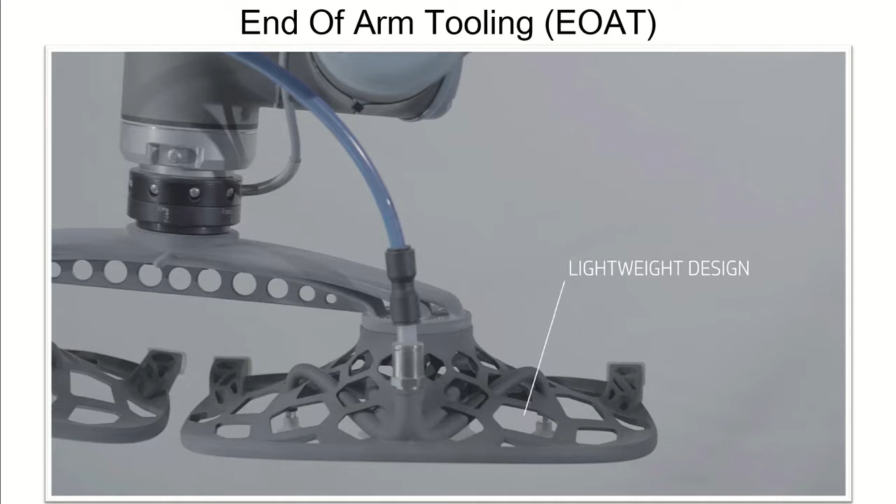There's actually a knurling that we print into the part, and it doesn't cost you any extra. Think about what it would cost if I had to machine those patterns in there - I'm either in there with an ultra small end mill trying to chew those things out, or more likely sitting on a sinker EDM with a graphite electrode burning those patterns in there, and your price and lead time are just skyrocketing. For us, we'll print the texture you want, and it doesn't cost you anything extra.

Because if you take one thing away from this today, this is what I want you to remember. Get out your pens, because this is the most important thing: complexity is free, size drives cost.

So if you have a really small part that is insanely complex, that's the perfect MJF component, okay? Now if you have a really big block with almost no complexity to it, that's a terrible MJF component. Go do it on a Bridgeport, go do it on a CNC machine - that's where you want to do that stuff.

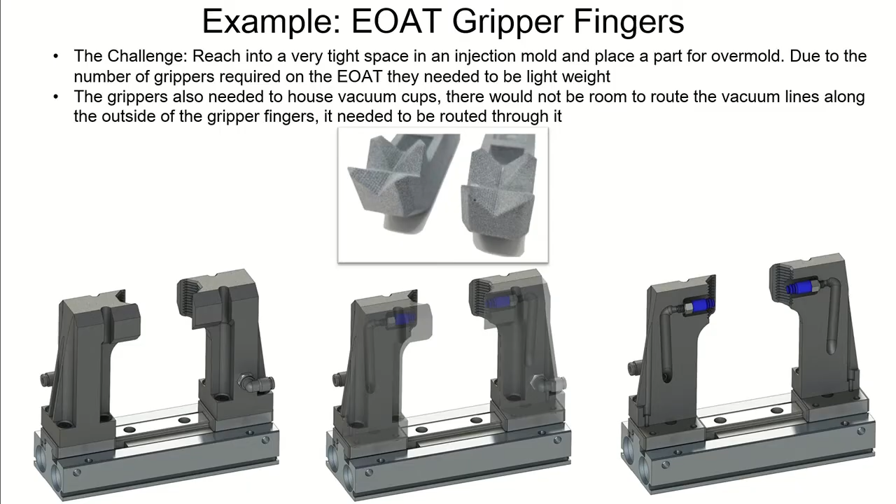I can't actually see my... anyways, the price on these guys, if you ordered one set of these from us, so 2 gripper fingers, one set, about $340. If you ordered 5 sets of these gripper fingers, it's $120 a set, because you're filling up a layer of my machine. And when you fill up that layer, you're buying Z height.

So if you can take multiple parts, or take some of these gripper fingers, some of these other gripper fingers, maybe some of the other parts I showed you for a specific application and batch them all together, the price just falls through the floor on all the parts. If you have the ability to batch stuff together, you'll see massive cost savings just because you're utilizing more space on the machine. It's kind of counterintuitive coming from traditional manufacturing like CNC or sheet metal - yeah, more volume, the price per part will slowly tick down, but here the price just falls off a cliff. It's like straight down.

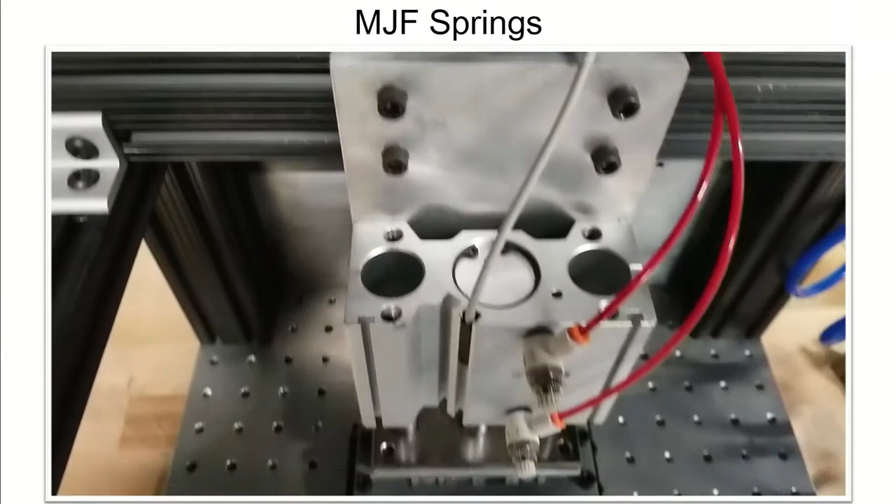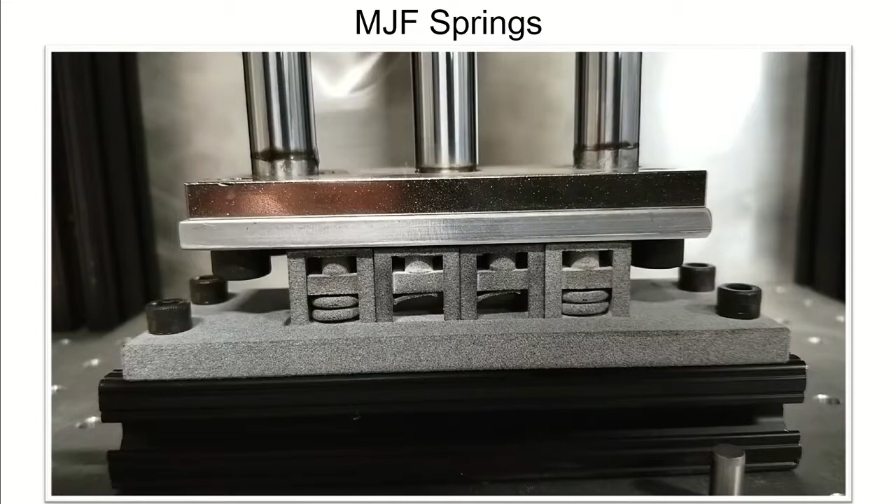MJF springs - essentially you can print springs. For momentary type applications where the spring is just being pressed down momentarily, or if it's like a detent where you're sliding over top of it and then the part pops back up behind it, works really good for that. Doesn't work in long-term compression though - the material picks up a memory and you don't get the same return force. So good for momentary applications, not as great for long-term hold type applications.

Again, these parts are in back.

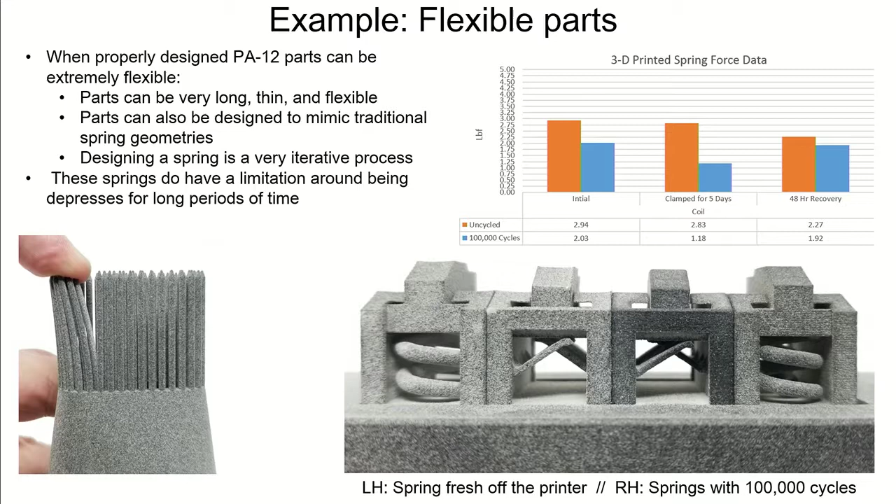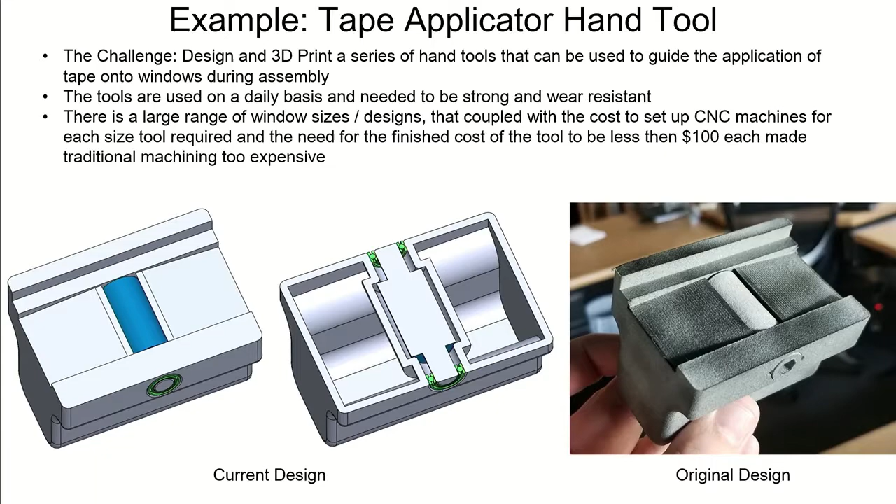Hand tools - this is one that we do for a company that makes tape, and they send a lot to all the window companies, like Andersen Windows, Pella Windows, all down in Mexico. If you buy a double hung window from Home Depot, it is held together with tape, just double-sided sticky tape. This tape company was spending a fortune machining Delrin tape applicators because of all the different extrusion profiles they're trying to work with. We were able to come up with a way to do these in MJF that was half the cost, and we were also able to integrate a roller right into it. That roller is printed, captured into the part - it's not removable. So instead of wetting the part or putting the tape on and then having to take a roller and wet the tape out by hand, in one movement they've aligned and wetted out the tape. So these are really good.